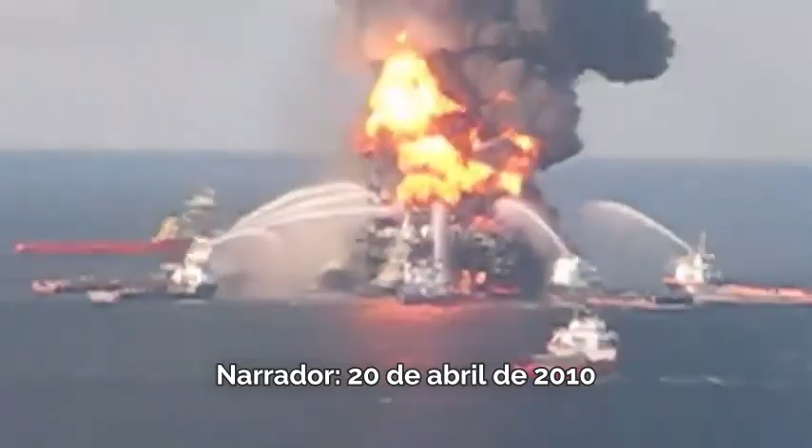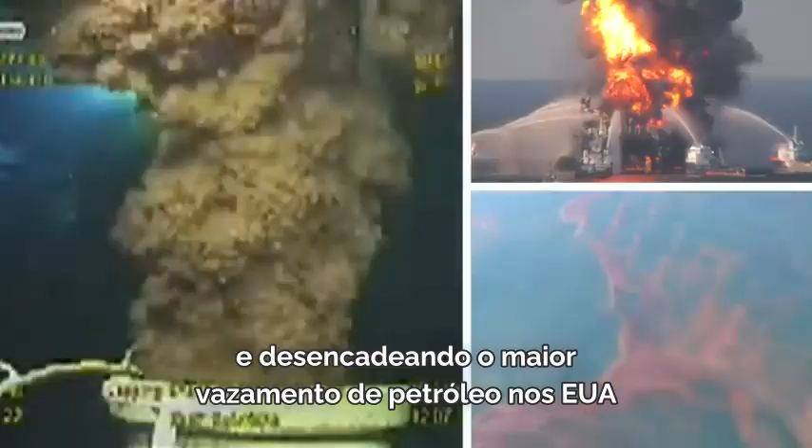April 20th, 2010. 11 workers died and 17 were seriously injured by an explosion on the Deepwater Horizon, an offshore drilling rig located approximately 50 miles off the coast of Louisiana. The rig burned for 2 days, eventually sinking and triggering the largest oil spill in U.S. history as oil and gas spewed up from the sea floor.

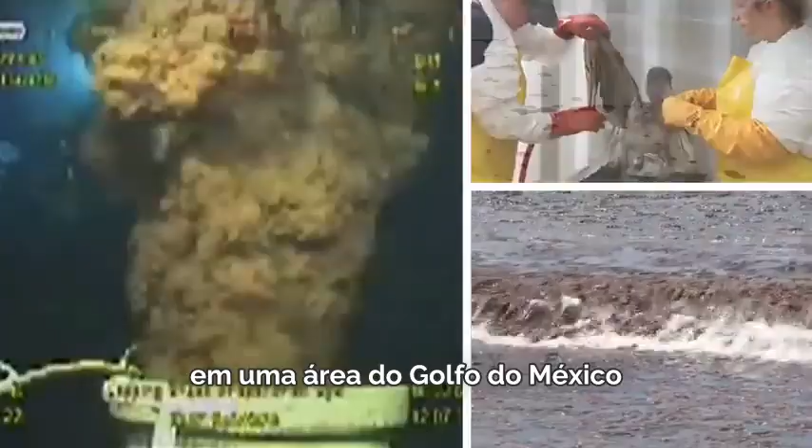The Deepwater Horizon had been drilling an oil well in 5,000 feet of water in an area of the Gulf of Mexico known as the Macondo Prospect. In 2010, the CSB launched an investigation to examine the technical, organizational, and regulatory factors that contributed to the accident.

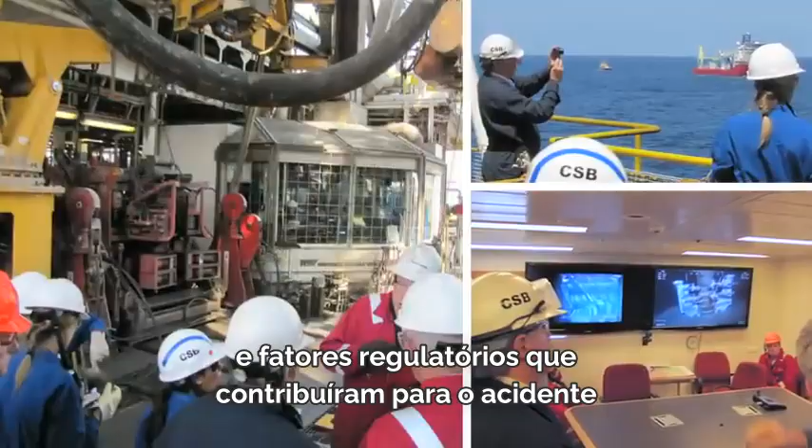During the investigation, the CSB made new findings about why a key piece of safety equipment, the Deepwater Horizon's blowout preventer, failed to seal the well during the emergency. These new findings help explain why the accident was so devastating, and the CSB cautioned that other blowout preventers currently in use could fail in similar ways.

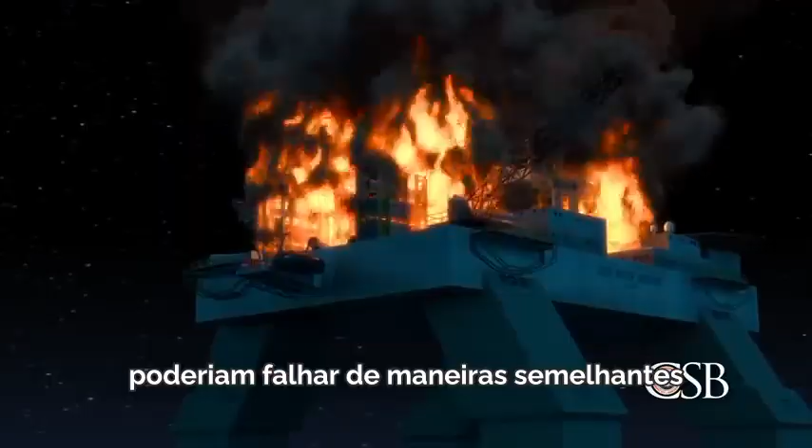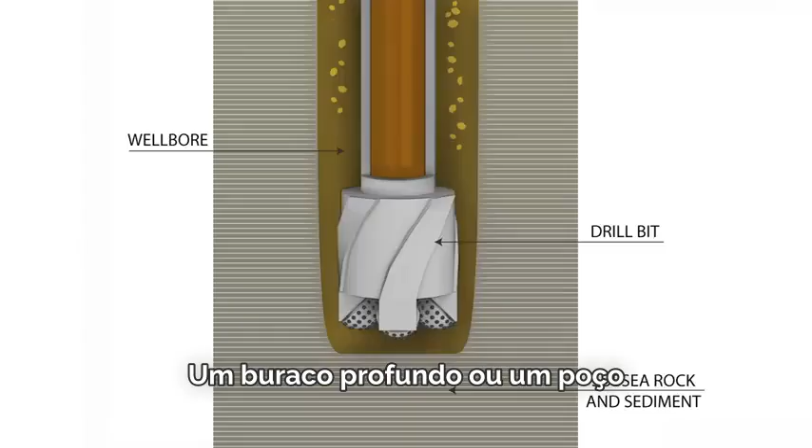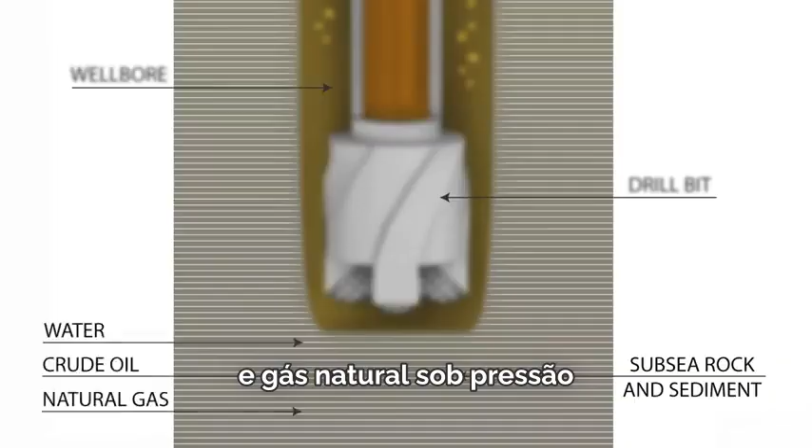Drilling an offshore well involves creating a pathway between the drilling rig and oil and gas reservoirs trapped beneath the sea floor. A deep hole, or wellbore, is drilled through layers of subsea rock and sediment. These rocky layers can contain trapped water, crude oil, and natural gas under pressure. An unplanned flow of these well fluids into the wellbore, known in the industry as a kick, can be dangerous.

Without careful management, a kick can lead to a blowout, the uncontrolled release of flammable oil and gas from the well. A blowout can be catastrophic, since oil and gas reaching the drilling rig can quickly find an ignition source, leading to a fire or explosion, endangering the lives of the drilling crew.

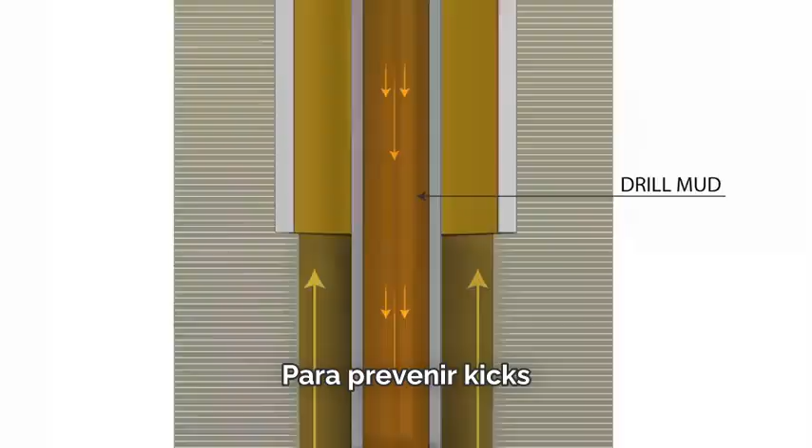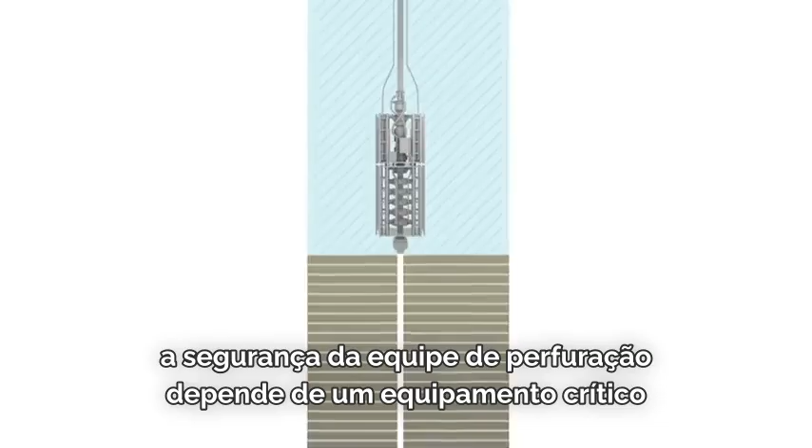To prevent kicks, drillers pump a dense slurry called drilling mud into the well, creating a barrier between the undersea oil and gas and the piping that leads to the rig. If this mud barrier fails or is somehow removed, the safety of the drilling crew depends on a critical piece of equipment located on the sea floor called the blowout preventer, or BOP.

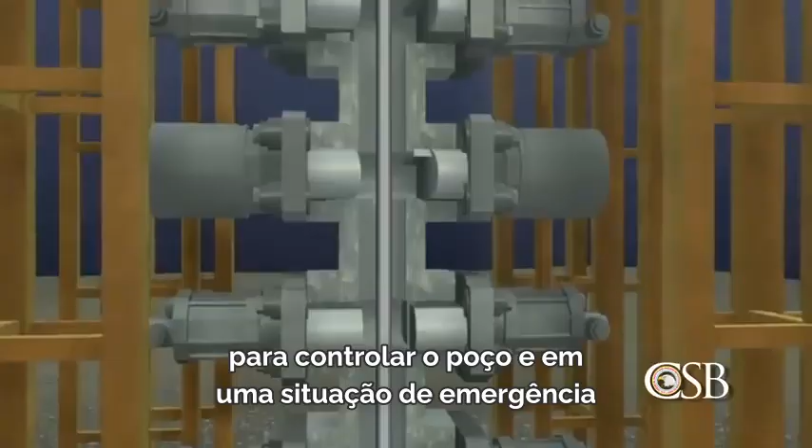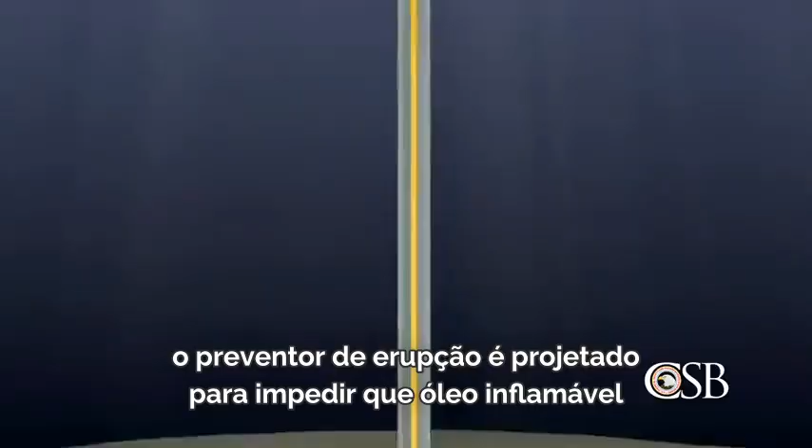The BOP is a complex electrically and hydraulically powered device that is essential for controlling the well and, in an emergency situation, preventing a disaster on the platform high above on the sea surface. The BOP is connected to the rig by a large diameter pipe called a riser. If a kick occurs, the blowout preventer is designed to prevent flammable oil and gas from traveling up the riser to the drilling rig. This is done by sealing the area around the drill pipe, known as the annular space.

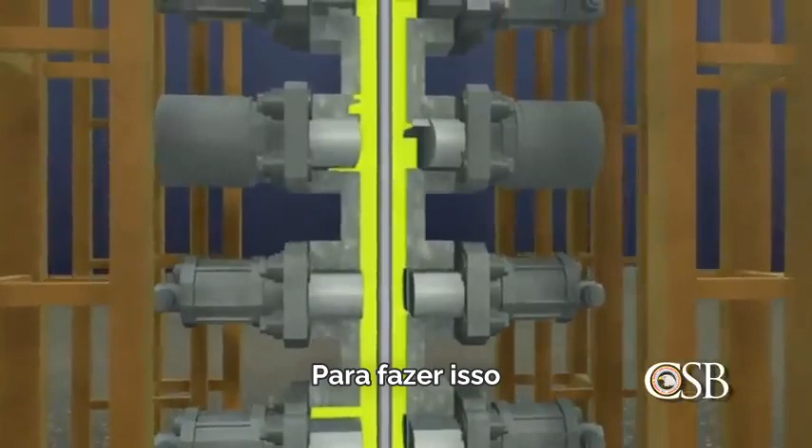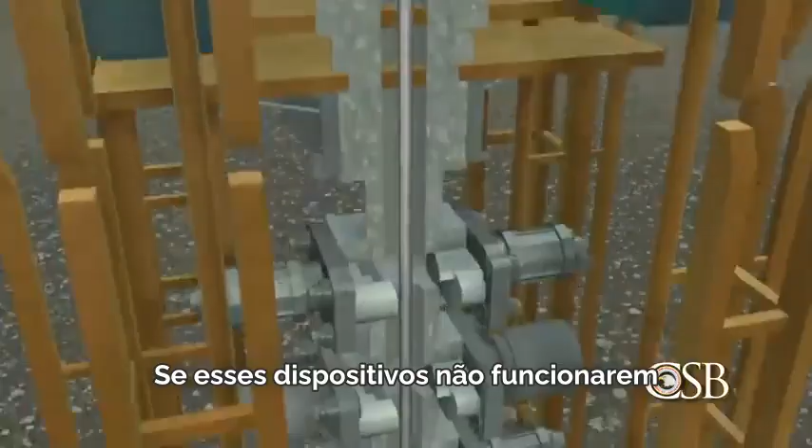To do this, the crew can manually close pipe rams and donut-shaped rubber devices known as annular preventers. If those devices should fail to work, the last resort is a pair of sharp metal blades which form a blind shear ram designed to cut the drill pipe and seal the well. The blind shear ram can be activated manually or by automated emergency systems.

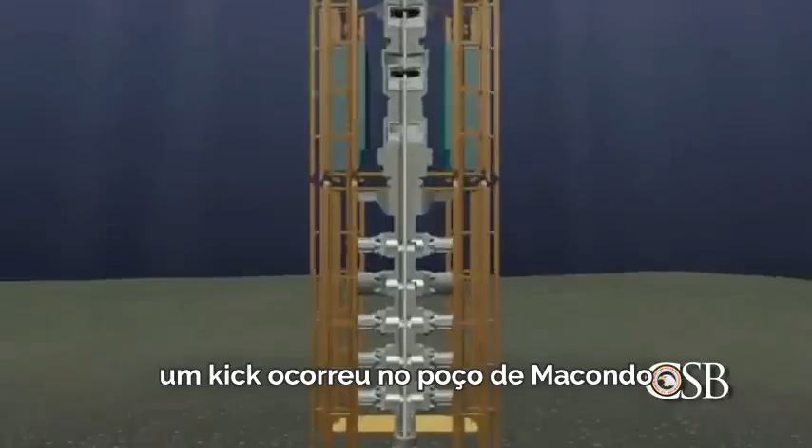At approximately 8:45 p.m. on April 20th, 2010, a kick occurred in the Macondo well. Oil and gas entered the wellbore undetected, eventually passing above the blowout preventer and traveling quickly up the riser toward the Deepwater Horizon and the 126 people on board. Just after 9:40 p.m., drilling mud, forced upwards by the rising oil and gas, suddenly blew out onto the rig.

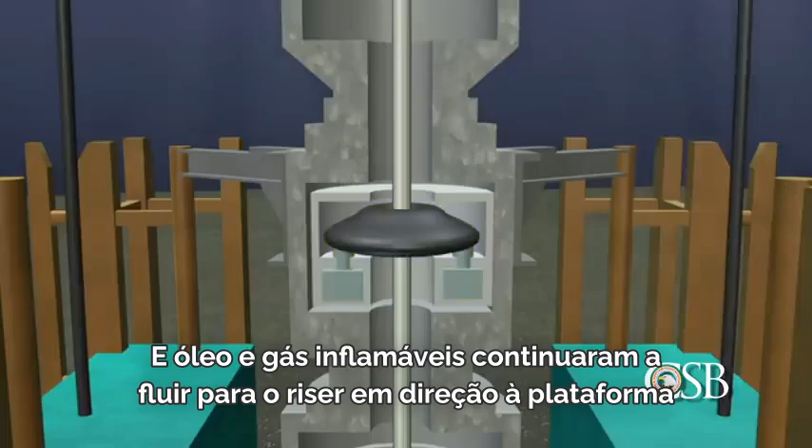Crew members responded by closing the upper annular preventer in the BOP. However, this did not seal the well as intended, and flammable oil and gas continued to flow into the riser toward the rig. Next, the crew closed a pipe ram. This successfully closed the annular space and sealed the well, but tragically this proved to be only a temporary fix. Oil and gas that were already above the pipe ram continued to flow inexorably toward the Deepwater Horizon.

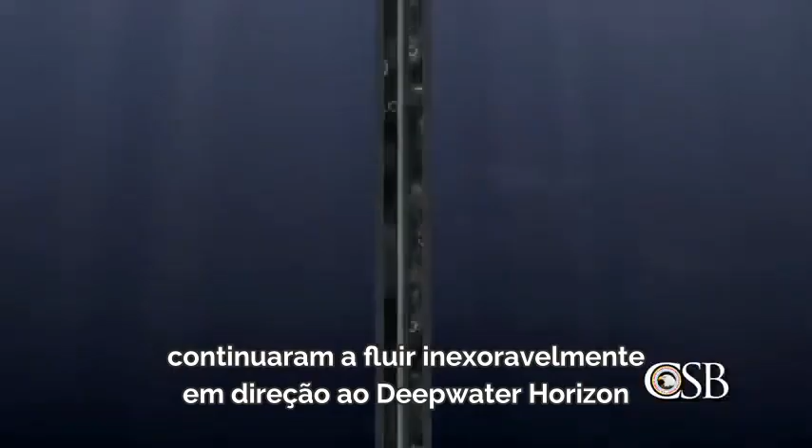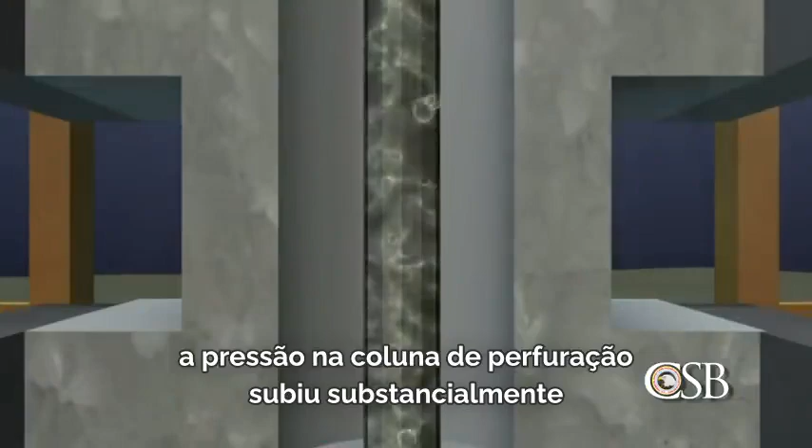As the oil and gas escaped the riser onto the rig, the pressure dropped in the annular space above the pipe ram. But at the same time, the pressure in the drill pipe climbed substantially. The drill pipe was closed at the top, but oil and gas continued to flow in from the reservoir below.

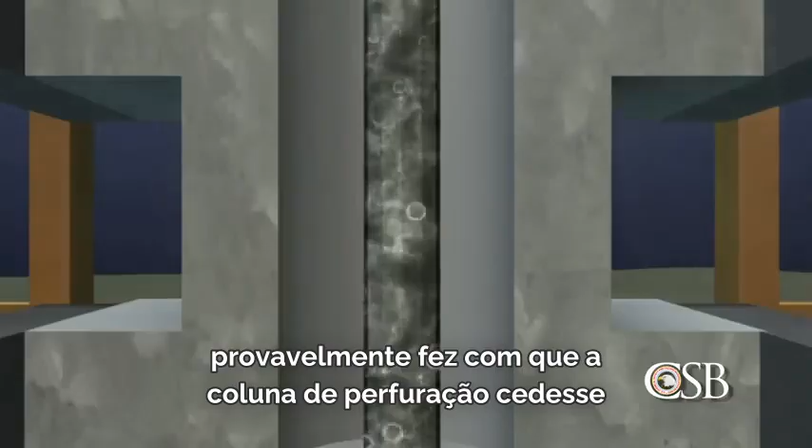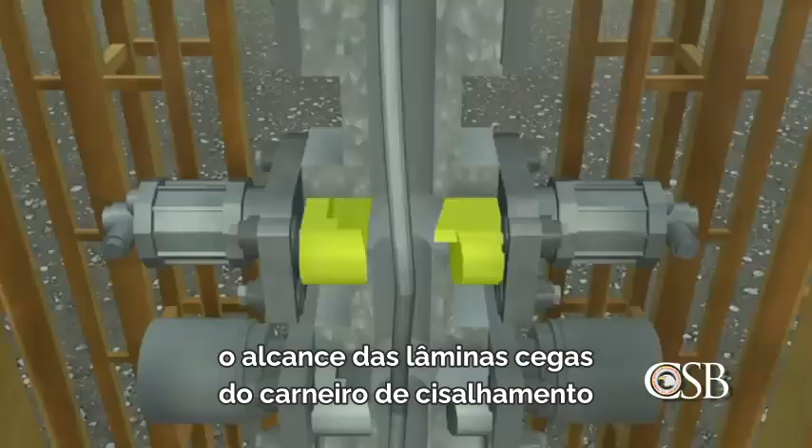After extensive analysis, the CSB concluded that this large difference in pressure likely caused the drill pipe to buckle, essentially bending the pipe off-center inside the blowout preventer. The buckling pushed sections of the drill pipe outside of the reach of the blind shear ram blades. This would eventually prove to be catastrophic.

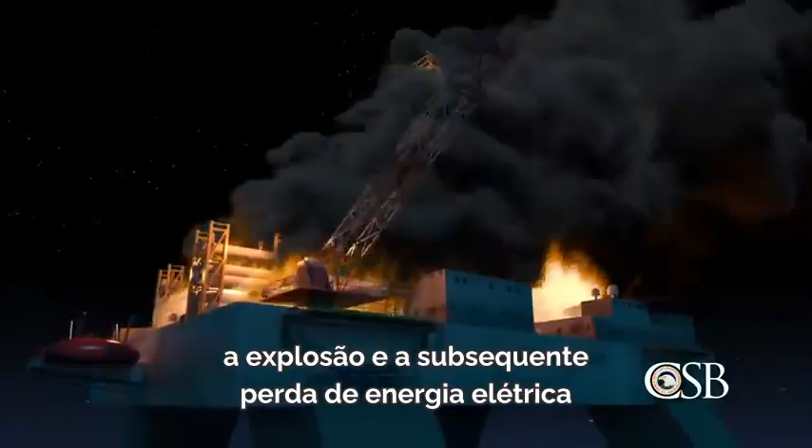At approximately 9:49 p.m., the flammable hydrocarbons found an ignition source, and the first explosions shook the Deepwater Horizon. With the drill pipe buckled, the explosion and subsequent loss of electrical and hydraulic power from the rig likely activated an automated system on the blowout preventer known as the AMF deadman, which closes the blind shear ram and cuts the drill pipe. This emergency system is designed to activate when electric power, hydraulic pressure, and communications from the rig

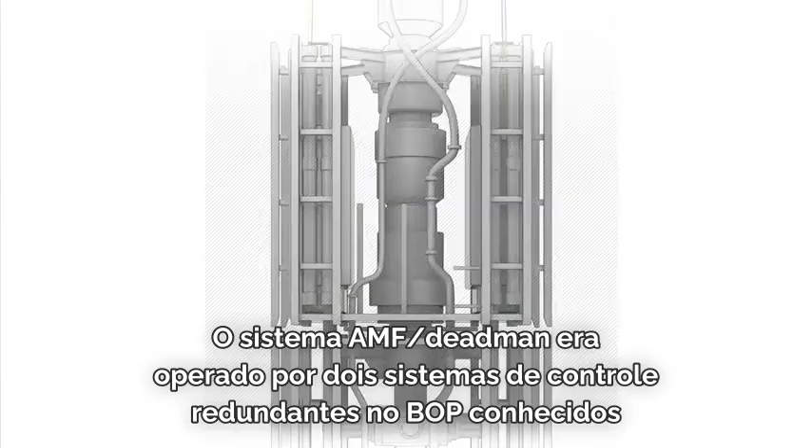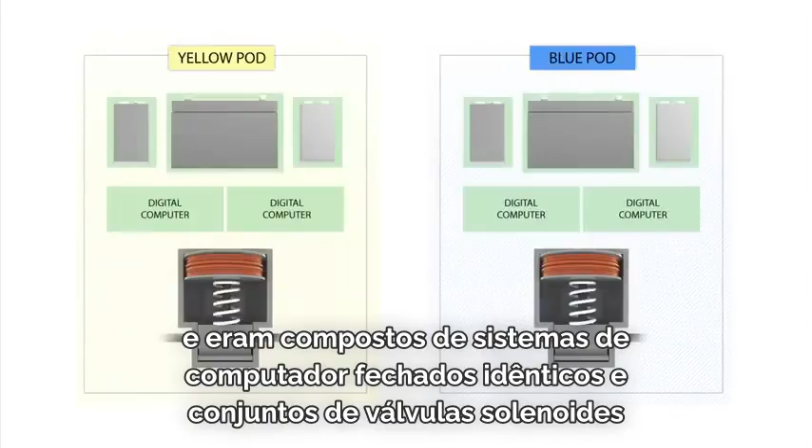have been lost. The AMF deadman system was operated by two redundant control systems on the BOP, known as the yellow pod and the blue pod. The redundancy is supposed to increase the reliability of the system in an emergency situation. The yellow and blue pods worked independently of each other and were comprised of identical enclosed computer systems and sets of solenoid valves. When activated, the solenoid valves controlled important BOP functions, such as closing the blind shear ram.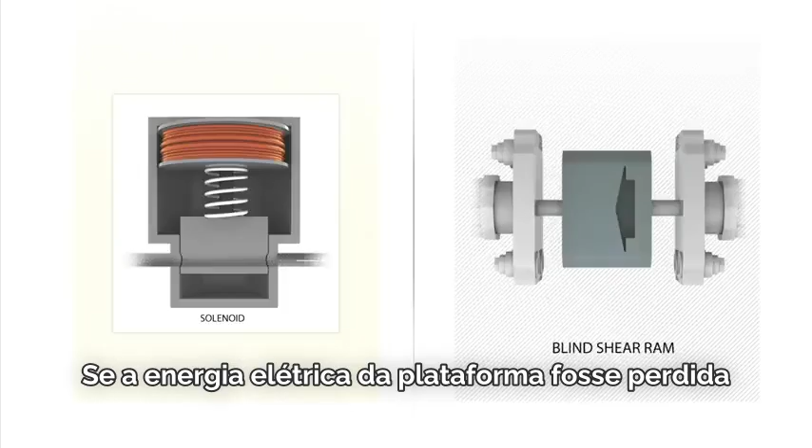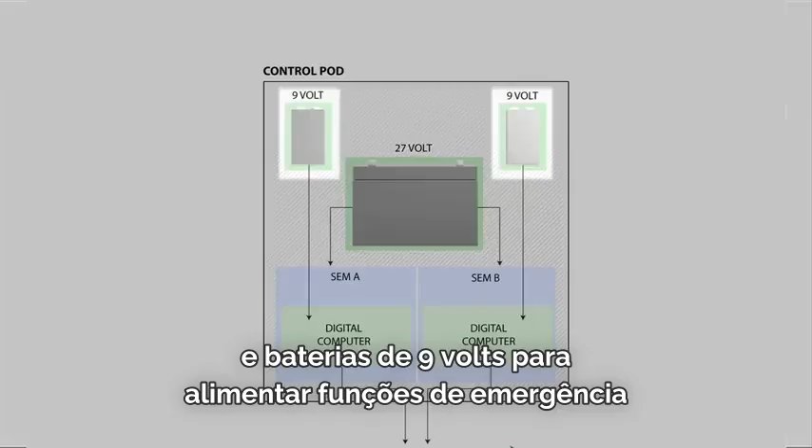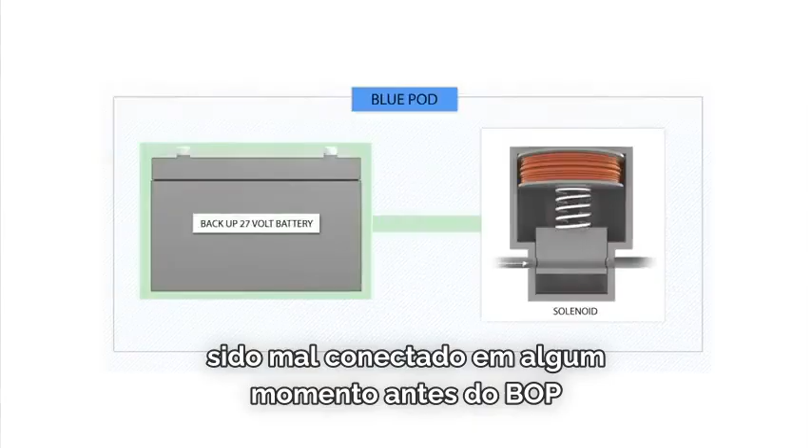If electrical power from the rig was lost, as happened on April 20th, 2010, both the yellow and blue control pods contained backup 27-volt and 9-volt batteries to power emergency functions. The 9-volt batteries powered computers that would activate the solenoid valves, which were powered by the 27-volt batteries. However, evidence indicates the blue pod had been miswired at some time before the BOP was lowered onto the seafloor. This caused the pod's 27-volt battery to drain and made it impossible to operate the solenoid valve for the blind shear ram on the night of the accident.

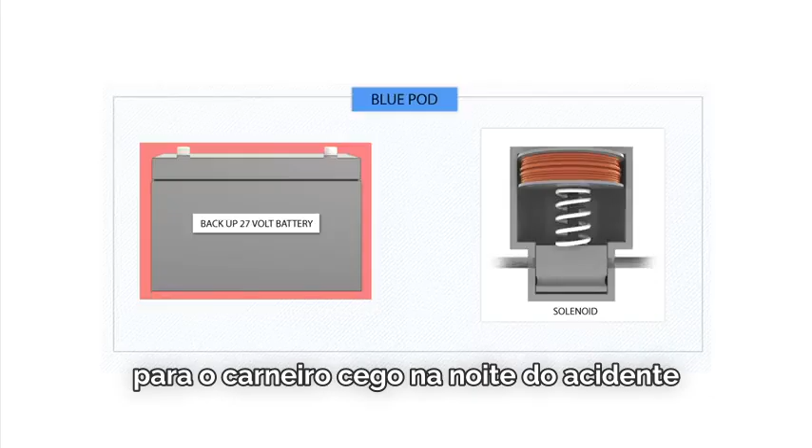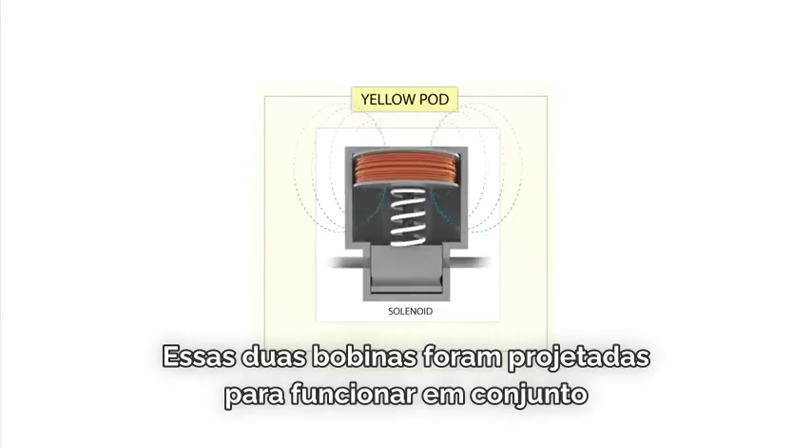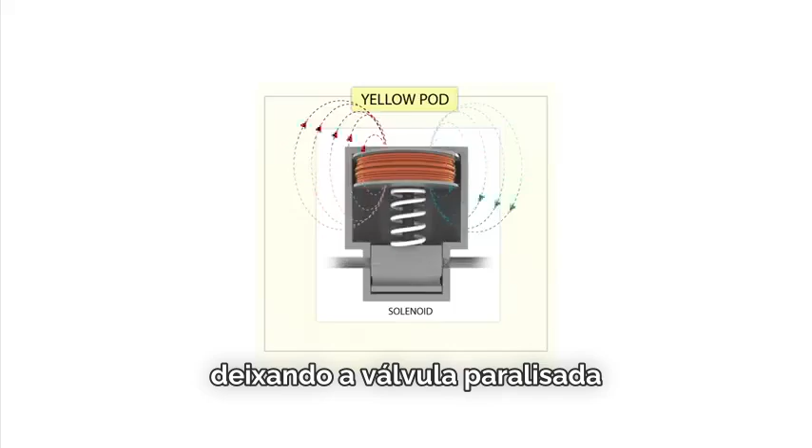And within the redundant yellow pod, the solenoid for the blind shear ram had been miswired. The solenoid valves were controlled by two coils of electrical wire. These two coils were designed to work in concert, generating a magnetic field strong enough to operate the valve. But within the miswired solenoid valve, the two coils actually opposed each other, leaving the valve paralyzed. Only a third unplanned failure allowed the yellow pod to operate. On the night of the accident, one of the 9-volt batteries that powered the solenoid valve's computer had failed. As a result, the affected computer system could not initiate the command to energize the miswired coil.

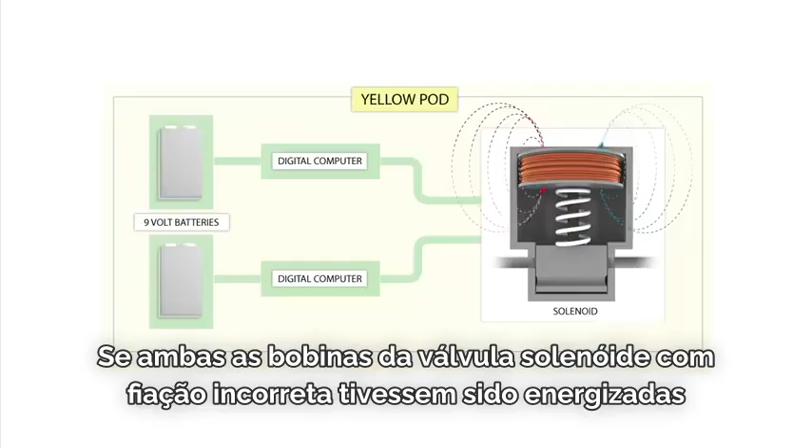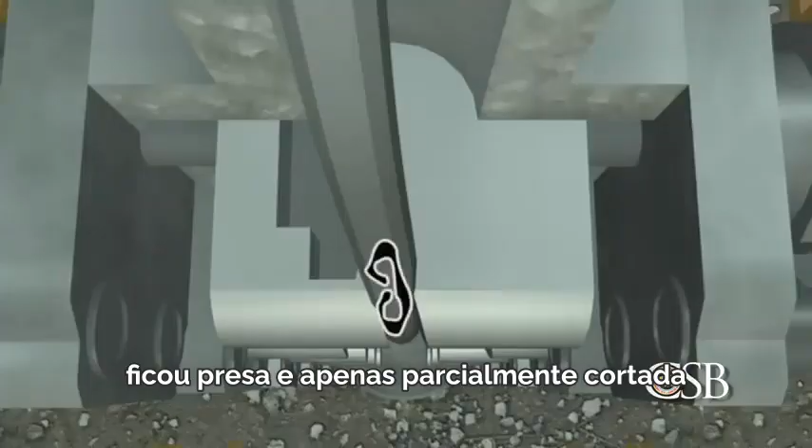Had both coils of the miswired solenoid valve been energized, the two coils would have generated opposing forces on the valve. The solenoid valve would have remained closed, and the blind shear ram would never have been closed. However, the failed battery rendered one coil inoperable, and most likely allowed the other coil to open the solenoid valve by itself. This in turn initiated closure of the blind shear ram. This should have cut the drill pipe and sealed the well, greatly reducing the impact of the accident. But because the drill pipe was buckled and off-center inside the blowout preventer, it was trapped and only partially cut. With the failure of this last-ditch measure, there was nothing left to stop the massive oil spill and the destruction of the rig.

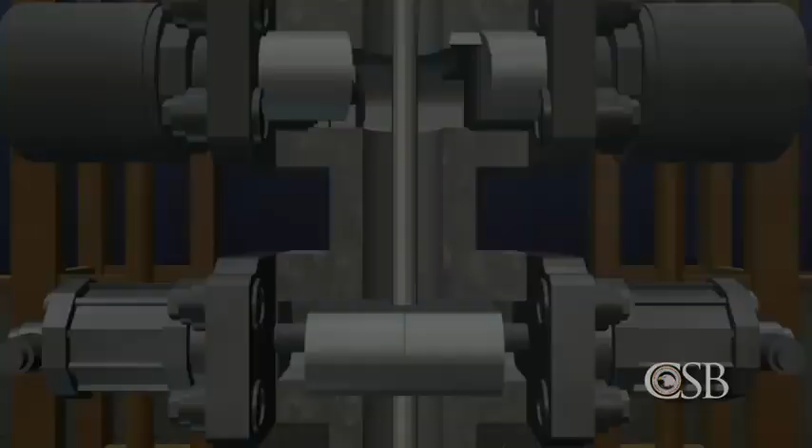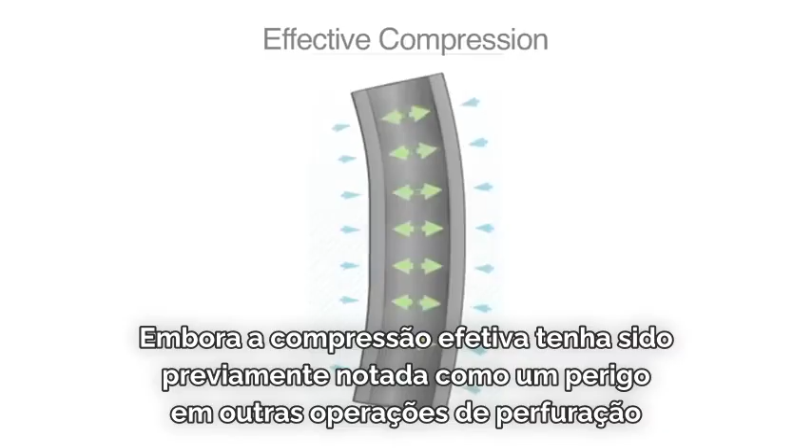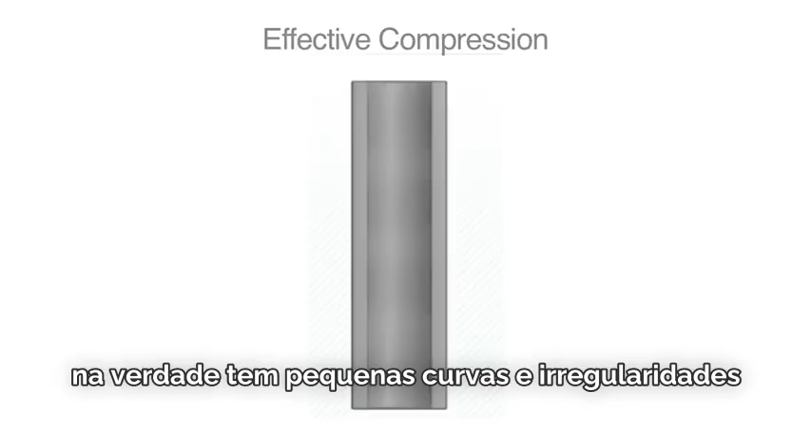During its investigation, the CSB identified a mechanism that likely caused the drill pipe to be buckled around the time of the explosion. This mechanism is called effective compression. Although effective compression had previously been noted as a hazard in other drilling operations, it had never been identified as a problem affecting drill pipe during well operations. Effective compression occurs because although pipe may appear to be perfectly straight, in fact it has minute bends and irregularities, invisible to the naked eye.

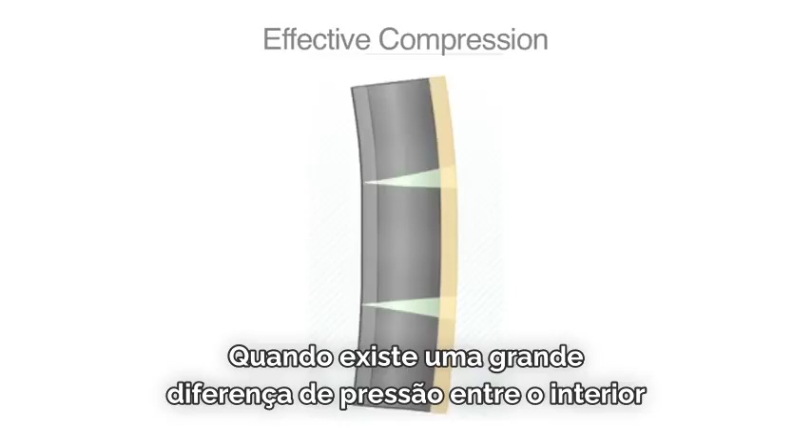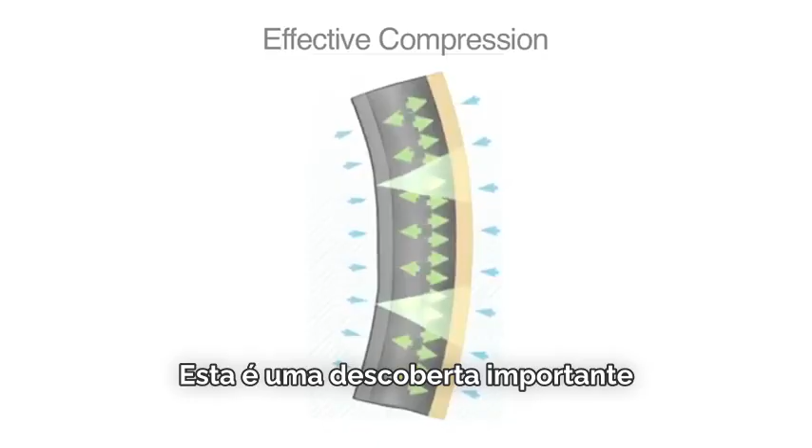Along these bends, the side of the pipe that is curved outward is slightly longer and has more surface area than the other side. When there is a large difference in pressure between the inside and outside of the pipe, as happened on April 20th, 2010, the longer side of the pipe experiences a larger bending force. Eventually, this force can become great enough to buckle even heavy pipe. This is an important finding, CSB investigators said, because the same conditions of differential pressure could occur at other drilling rigs, even if a crew successfully shuts in a well. The CSB warned this could make existing blowout preventer designs less effective in emergency situations.

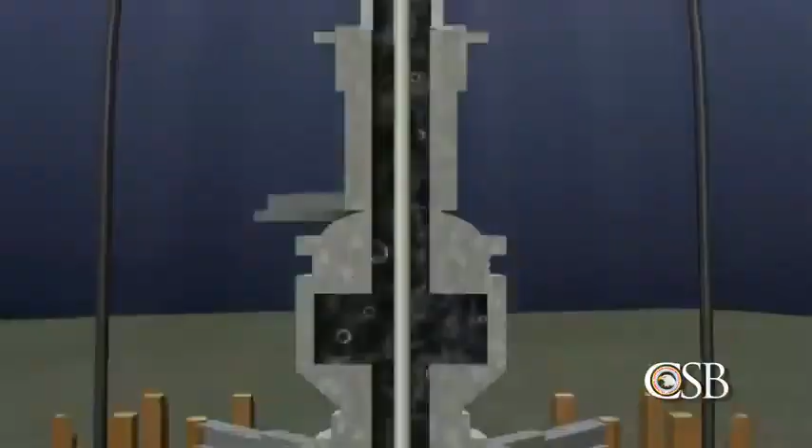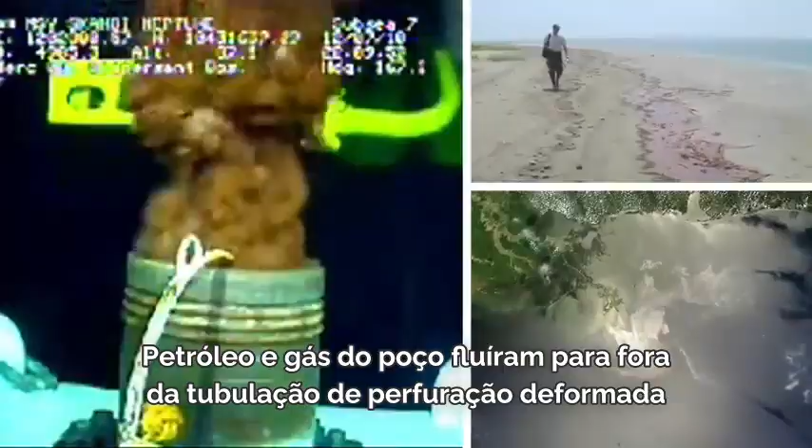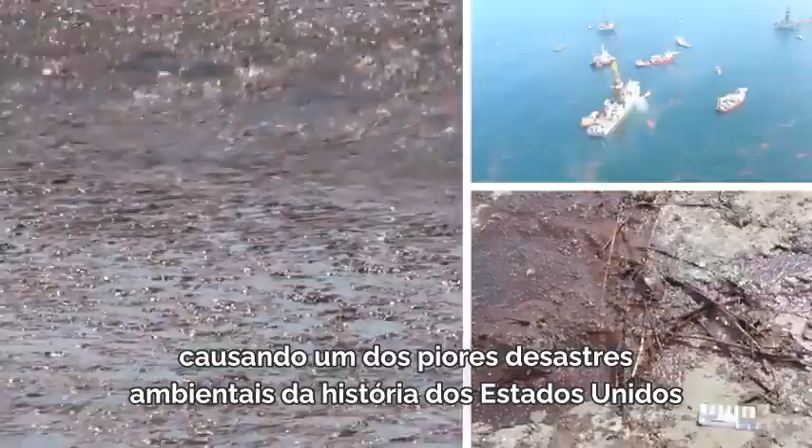In the case of the Deepwater Horizon accident, the buckled drill pipe prevented the blind shear ram from sealing the well. Oil and gas from the well flowed out of the buckled drill pipe and into the Gulf of Mexico for 87 days. A reported 5 million barrels of oil eventually spilled, causing one of the worst environmental disasters in United States history.